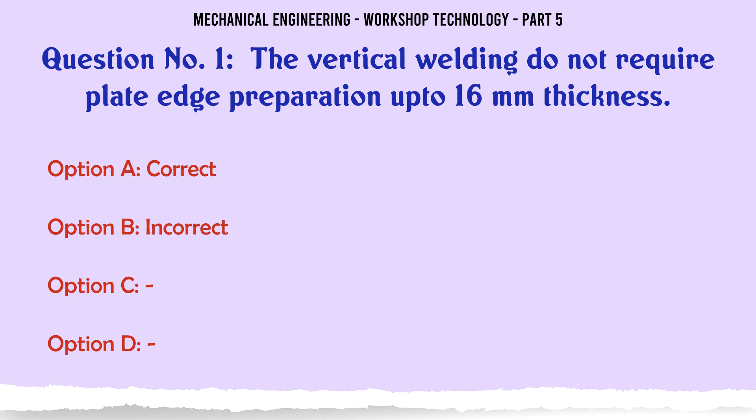Vertical welding does not require plate edge preparation up to 16 mm thickness. A. Correct. B. Incorrect. The correct answer is correct.

The dowels are A. Wooden nails, B. Box nails, C. Wire nails, D. None of these. The correct answer is wooden nails.

In arc welding, the temperature of heat produced by the electric arc is of the order of A. 3000 C to 4000 C, B. 4000 C to 5000 C, C. 5000 C to 6000 C, D. 6000 C to 7000 C. The correct answer is 6000 C to 7000 C.

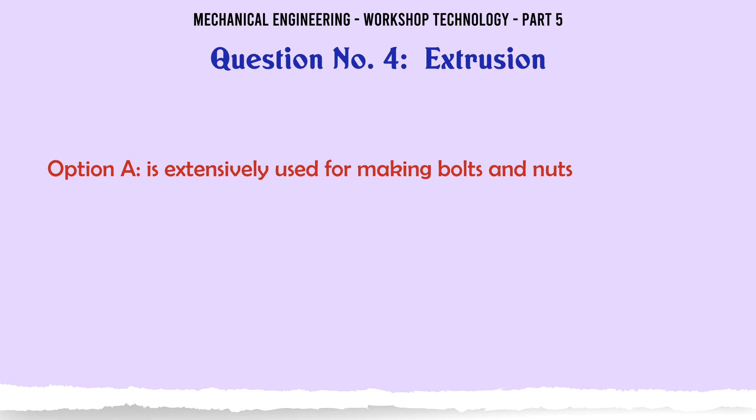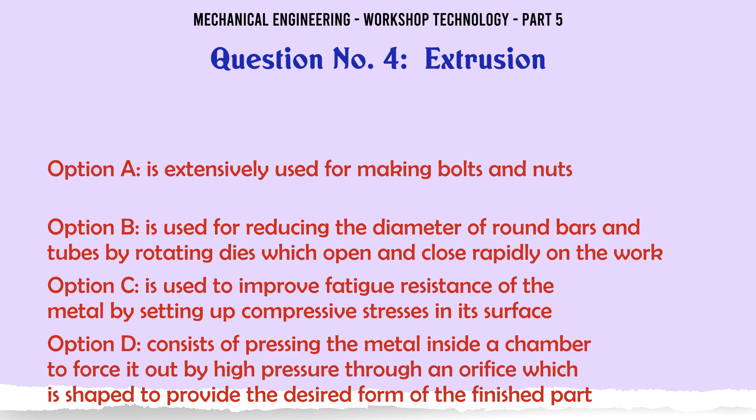Extrusion: A is extensively used for making bolts and nuts. B is used for reducing the diameter of round bars and tubes by rotating dies which open and close rapidly on the work. C is used to improve fatigue resistance of the metal by setting up compressive stresses in its surface. D consists of pressing the metal inside a chamber to force it out by high pressure through an orifice which is shaped to provide the desired form of the finished part. The correct answer is D, pressing the metal inside a chamber to force it out through a shaped orifice.

The operation of cutting off a flat sheet to the desired shape is called A. Shearing, B. Piercing, C. Punching, D. Blanking. The correct answer is shearing.

The process of decreasing the cross-section of a bar and increasing its length is called A. Drawing down, B. Upsetting, C. Spinning, D. Peening. The correct answer is drawing down.

A casting defect which occurs due to improper venting of sand is known as A. Cold shuts, B. Blowholes, C. Shift, D. Swell. The correct answer is blowholes.

Swab is used for A. Smoothing and cleaning out depressions in the mould, B. Cleaning the moulding sand, C. Moistening the sand around the edge before removing pattern, D. Reinforcement of sand in the top part of the moulding box. The correct answer is moistening the sand around the edge before removing pattern.

The temperature of the inner luminous cone of neutral flame is about A. 1000 C, B. 1250 C, C. 2100 C, D. 3200 C.

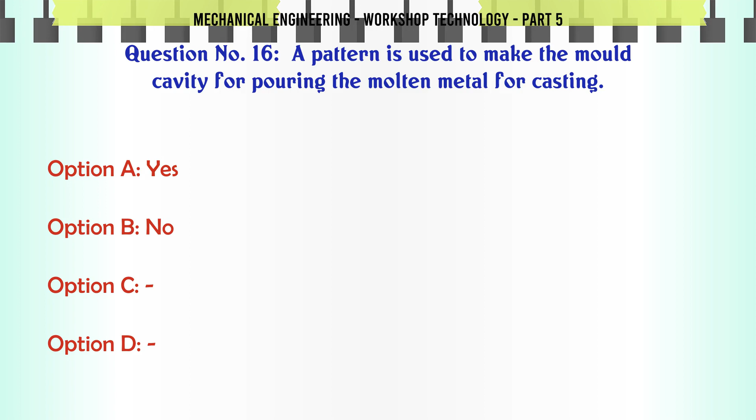A pattern is used to make the mold cavity for pouring the molten metal for casting. A. Yes. B. No. The correct answer is yes.

The surface to be left unmachined is marked on the pattern by A. Red color, B. Yellow color, C. Black color, D. Blue color. The correct answer is black color.

The welding process used in joining mild steel shanks to high-speed drills is A. Spot welding, B. Seam welding, C. Flash butt welding, D. Upset butt welding. The correct answer is flash butt welding.

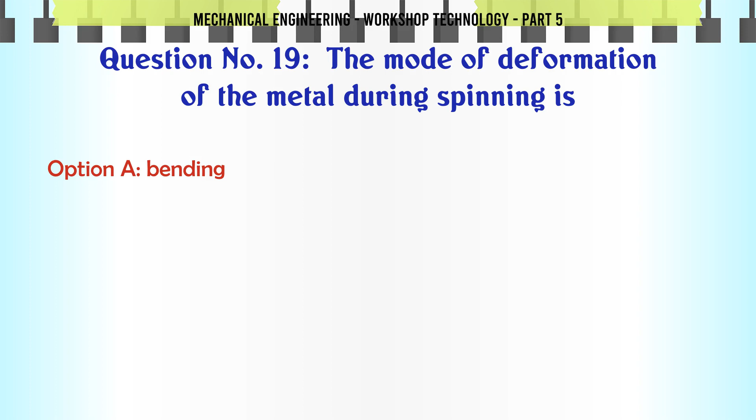The mode of deformation of the metal during spinning is A. Bending, B. Stretching, C. Rolling and stretching, D. Bending and stretching. The correct answer is bending and stretching.

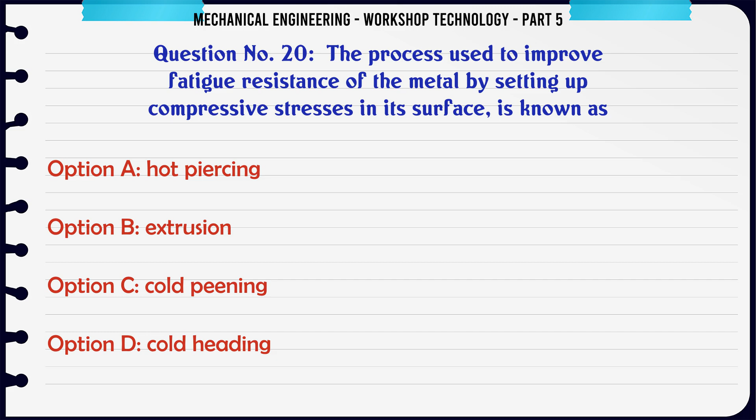The process used to improve fatigue resistance of the metal by setting up compressive stresses in its surface is known as A. Hot piercing, B. Extrusion, C. Cold peening, D. Cold heading. The correct answer is cold peening.

Fin is a casting defect which is due to thin projections of metal not intended as a part of casting. A. Correct, B. Incorrect. The correct answer is correct.

The process of increasing the cross-section of a bar at the expense of its length is called A. Drawing down, B. Upsetting, C. Spinning, D. Peening. The correct answer is upsetting.

In TIG arc welding, the welding zone is shielded by an atmosphere of A. Helium gas, B. Argon gas, C. Either A or B, D. None of these. The correct answer is either A or B.

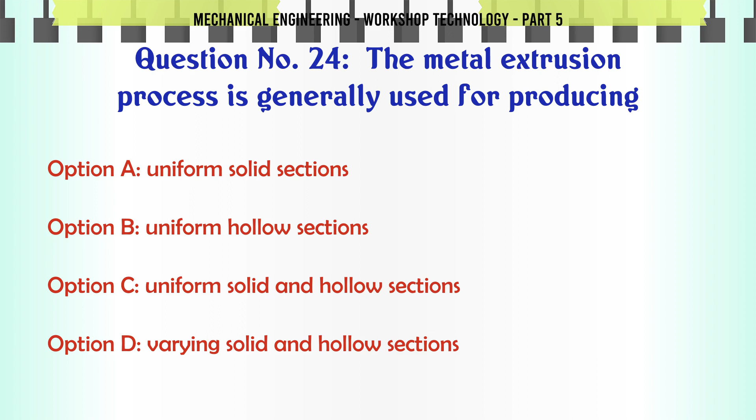The metal extrusion process is generally used for producing A. Uniform solid sections, B. Uniform hollow sections, C. Uniform solid and hollow sections, D. Varying solid and hollow sections. The correct answer is uniform solid and hollow sections.

The operation of giving impressions of figures, letters or designs on sheet metal parts is known as embossing.

In gas welding of mild steel using an oxy-acetylene flame, the total amount of acetylene consumed is 10 litre. The oxygen consumption from the cylinder is: A. 5 litre, B. 10 litre, C. 15 litre, D. 20 litre. The correct answer is 10 litre.

The sand used for making cores is: A. Green sand, B. Dry sand, C. Loam sand, D. Oil sand. The correct answer is oil sand.

Sand wash is a casting defect which: A. results in a mismatching of the top and bottom parts of a casting, B. results in general enlargement of the casting, C. occurs near the ingates as rough lumps on the surface of a casting, D. occurs as sand patches on the upper surface of a casting. The correct answer is occurs near the ingates as rough lumps on the surface of a casting.

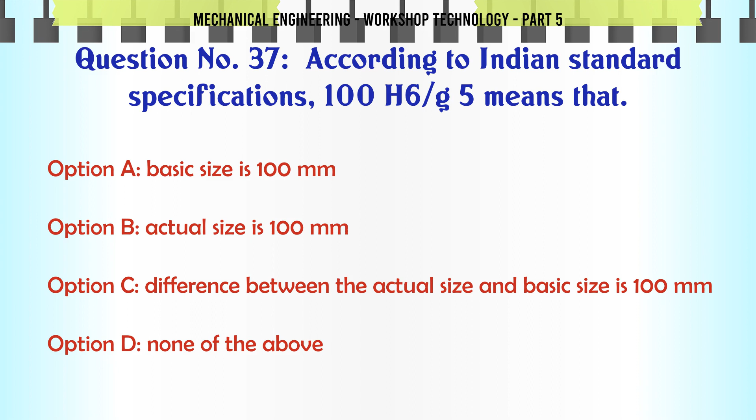According to Indian Standard Specifications, 100 H6/g5 means that: A. Basic size is 100 mm, B. Actual size is 100 mm, C. Difference between the actual size and basic size is 100 mm, D. None of the above. The correct answer is basic size is 100 mm.

Which of the following statement is wrong? A. The hot chamber die casting machine is used for casting zinc, tin, lead and other low melting alloys. B. The cold chamber die casting machine is used for casting aluminium, magnesium, copper base alloys and other high melting alloys. C. The castings produced by centrifugal casting method have open and coarse grain structure. D. All of the above. The correct answer is: the castings produced by centrifugal casting method have open and coarse grain structure.

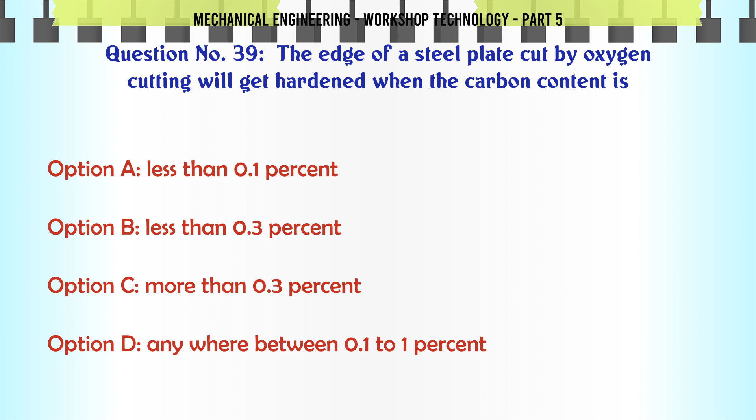The edge of a steel plate cut by oxygen cutting will get hardened when the carbon content is: A. less than 0.1%, B. less than 0.3%, C. more than 0.3%, D. anywhere between 0.1 to 1%. The correct answer is more than 0.3%.

In blanking operation, the clearance is provided on: A. punch, B. die, C. half on the punch and half on the die, D. either on punch or die depending upon designer's choice. The correct answer is punch.

In piercing operation, the clearance is provided on: A. punch, B. die, C. half on the punch and half on the die, D. either on punch or die depending upon designer's choice. The correct answer is die.

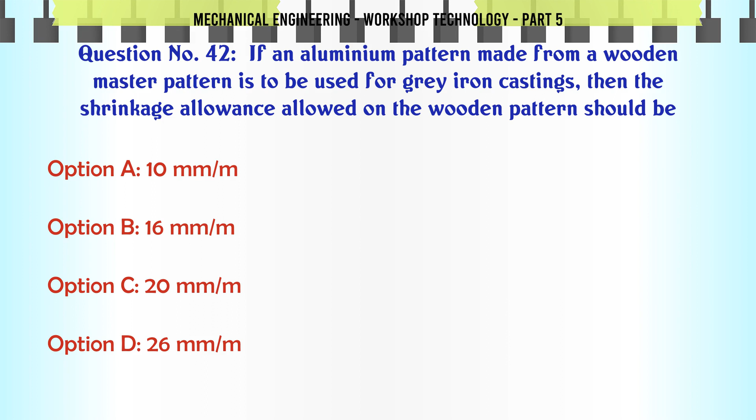If an aluminium pattern made from a wooden master pattern is to be used for grey iron castings, then the shrinkage allowance allowed on the wooden pattern should be: A. 10 mm/m, B. 16 mm/m, C. 20 mm/m, D. 26 mm/m. The correct answer is 26 mm/m.

For arc welding: A. alternating current with high frequency is used, B. alternating current with low frequency is used, C. direct current is used, D. any one of these. The correct answer is direct current is used.

When the file is moved to and fro over the work, it is known as: A. cross filing, B. draw filing, C. pull and push filing, D. none of these. The correct answer is draw filing.

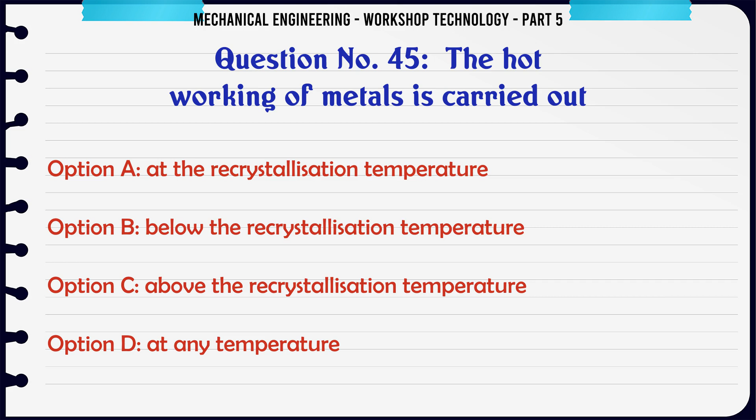The hot working of metals is carried out: A. at the recrystallization temperature, B. below the recrystallization temperature, C. above the recrystallization temperature, D. at any temperature. The correct answer is above the recrystallization temperature.

In a 4-high rolling mill, the diameter of backing up rolls is ___ the diameter of working rolls. A. equal to, B. smaller than, C. larger than. The correct answer is larger than.

The welding process used to join the ends of two pipes of uniform cross-section is: A. Spot welding, B. Seam welding, C. Projection welding, D. Upset butt welding. The correct answer is upset butt welding.

When the molten metal is fed into the cavity of a metallic mold by gravity, the method of casting is known as: A. Die casting method, B. Slush casting method, C. Permanent mold casting method, D. Centrifugal casting method. The correct answer is permanent mold casting method.

Hot piercing is extensively used for making bolts and nuts. A. Yes, B. No. The correct answer is no.